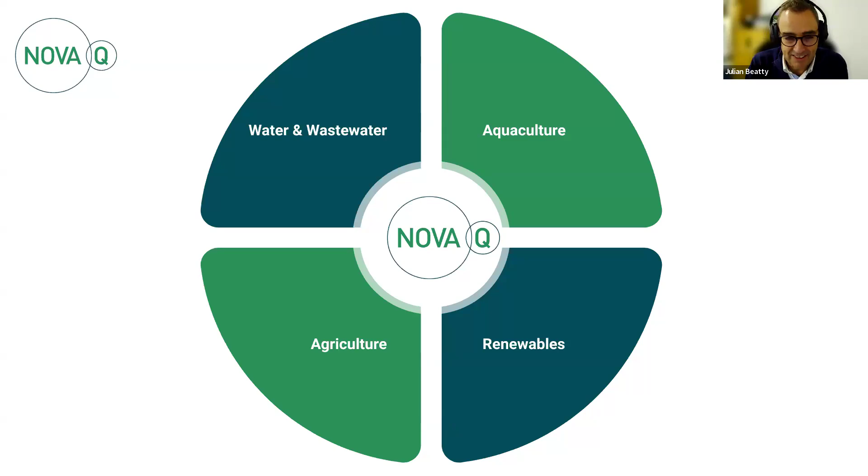For those that don't know us, NovaQ has been around now for 17 years, operating in Ireland and across Europe, in water, wastewater, aquaculture, and businesses in agriculture and renewables. Today, for the Water and Environmental Society of Engineers Ireland, we're going to focus on a couple of recent developments and innovations in terms of the wastewater side of things.

Some of it's innovation, some of it's addressing emerging challenges. I think the PFAS side of things is probably a scary area for a lot of people, and the fines filtration is very closely aligned—it works very well with the activated carbon part of the PFAS removal, so there's a logic to them all. The third area where we're very active is biological wastewater treatment, but that's for another day.

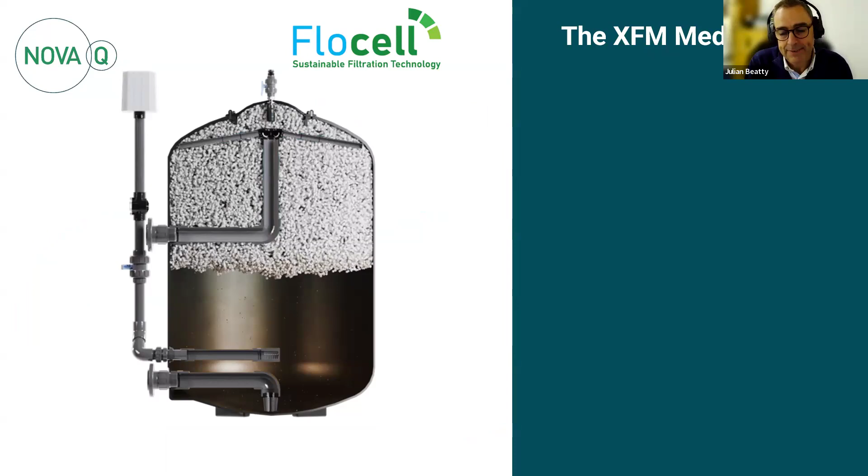So I'm going to start off on the Flocell XFM filters. Some of you may have seen these at the recent water and wastewater exhibition, or at various other water shows. They're a relatively new concept, and as opposed to, if you're looking in the space of fines filtration, you're comparing it to sand filters, cloth filters, all of that area. Key with these is that as a media filter and an upward flow filter, you're dealing with totally different pressures to those that you have in sand filters and cloth filters.

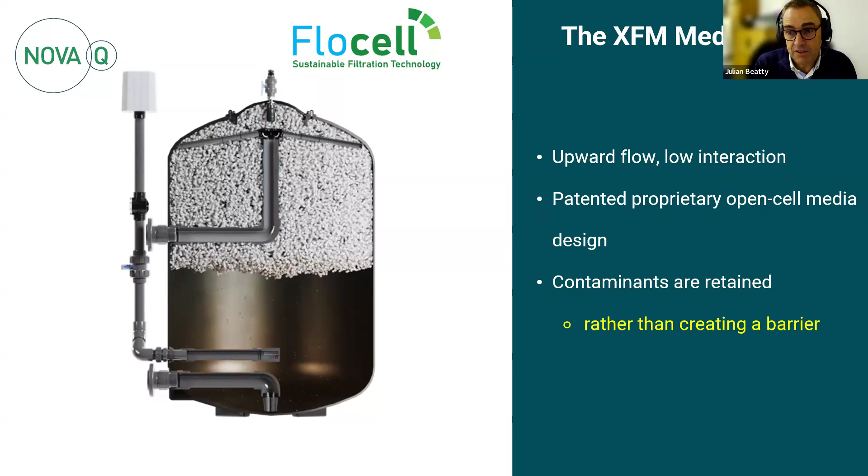So it's probably better to say that the contaminants are retained rather than the filter acting as a barrier, and that description is important. The relevance of it relates to the specific media they have—very, very small inside the filters. In each filter there's about 1,200 liters, and there's about a meter cubed of plastic media within that.

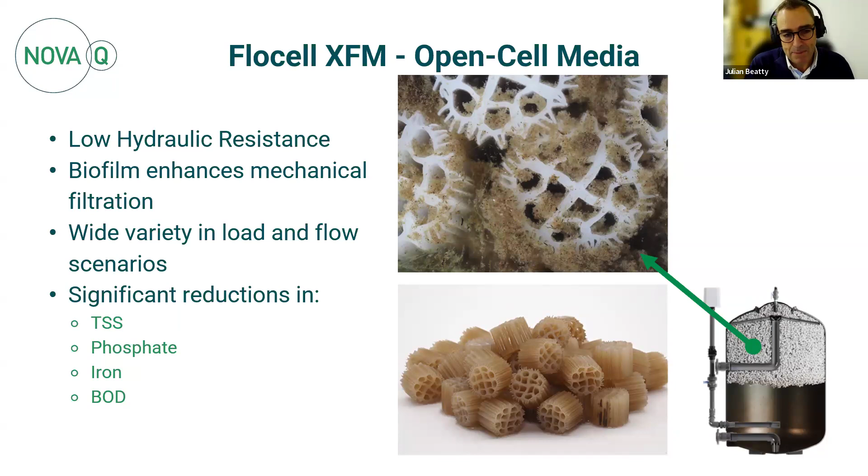The key feature, the key benefit is: sand filters and cloth filters very quickly have a hydraulic loss. With the open cell media, there's very, very little hydraulic resistance. Ironically, the dirtier the filter gets, the better it actually performs, because the biofilm that builds up on the media enhances the mechanical filtration properties. So we're targeting suspended solids, phosphorus, iron, BOD, COD reduction, and so on.

So I've got a couple of quick videos here now, which will illustrate how these filters work relative, in this case, to a sand filter. Importantly, these filters have got about 100 times more retention capacity than sand filters and cloth filters.

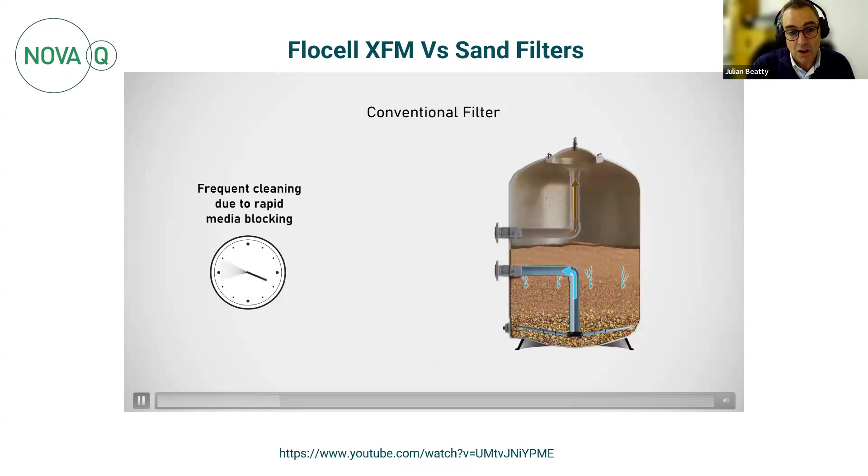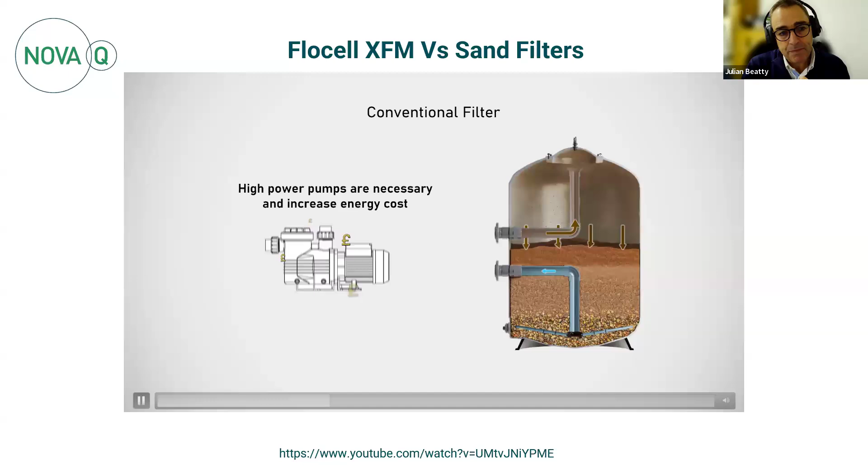Your conventional filter is top down—the water comes down through the sand, and the solids build up at the top of the sand. But as the solids build up, they cause a barrier within their own right, making the hydraulic properties much more difficult, meaning more energy needed. With the media filters, the water goes up through the filter, and the media itself is buoyant, so it's actually gravity that's retaining the solids within the media. This means it can last an awful lot longer without having to be cleaned or backwashed.

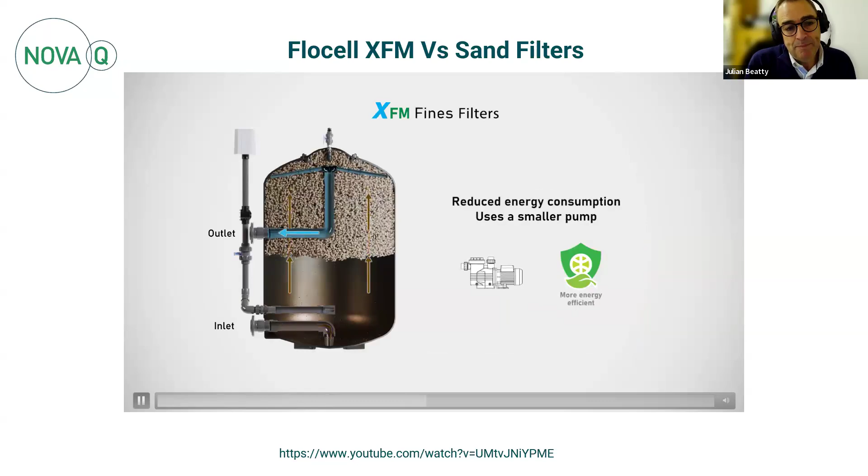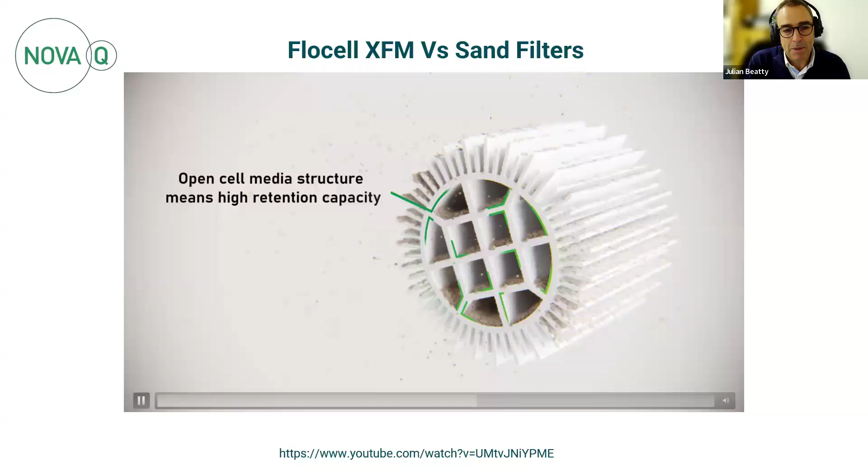The backwashing is very different, and I'll go into that in a second. Basically what you're looking at is the solids here. They're retained in the media by the resistance of the media, and part of that is a bit of a lamella effect within the media itself. This is all certified by Cranfield, and their paper is available.

For the backwashing of a sand filter, you reverse the flow, the water comes up from the bottom, it raises the sand and lifts the solids, but you use a lot of water in the process of backwashing.

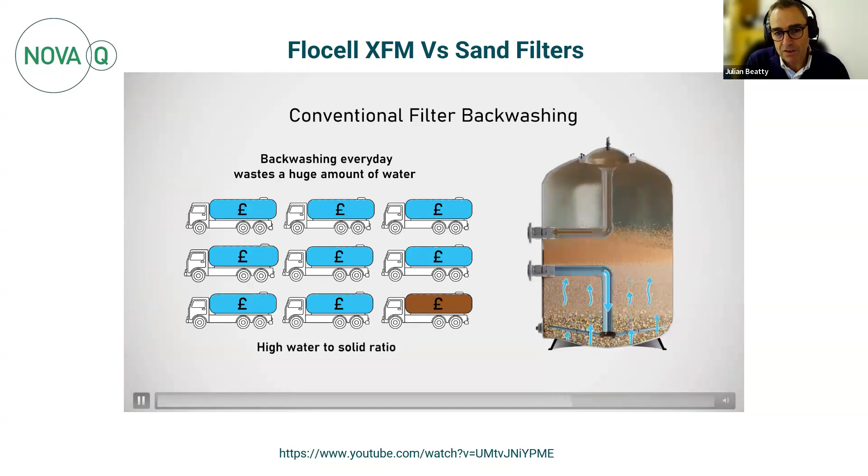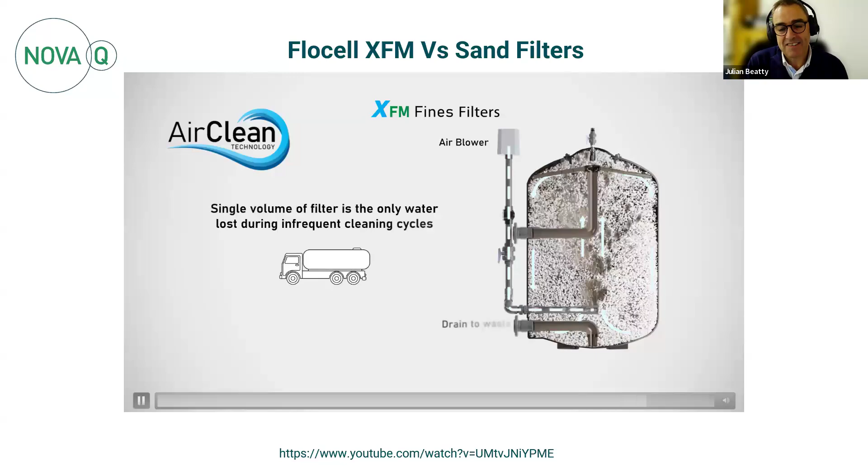With the XFM filters, we use a patented air process where we stop the flow, turn on the blower, and the blower moves all the media and dislodges all the solids off the media. We then just drain the tank. So your total amount of water lost in a backwash is one fill of water, about 1,000 liters per filter.

To see this visually, anyone who's been at the exhibitions will have actually seen this unit. It's our demo unit in play.

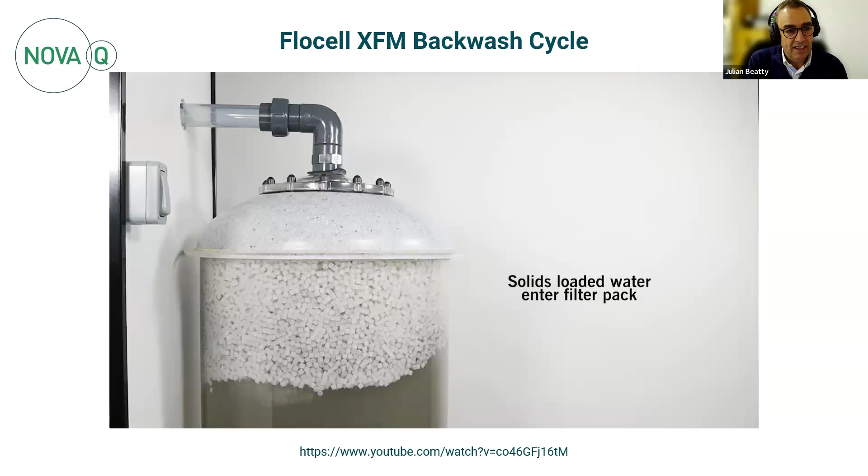You can see here as the water rises, the plastic media, being buoyant, stays up at the water level and comes up to the top of the filter. The dirty water there, you can see there's a whole lot of particulates in this case. It gets up to the top of the filter, and you'll see in a second the clean water coming out the top of the filter, while the solids are retained within the media.

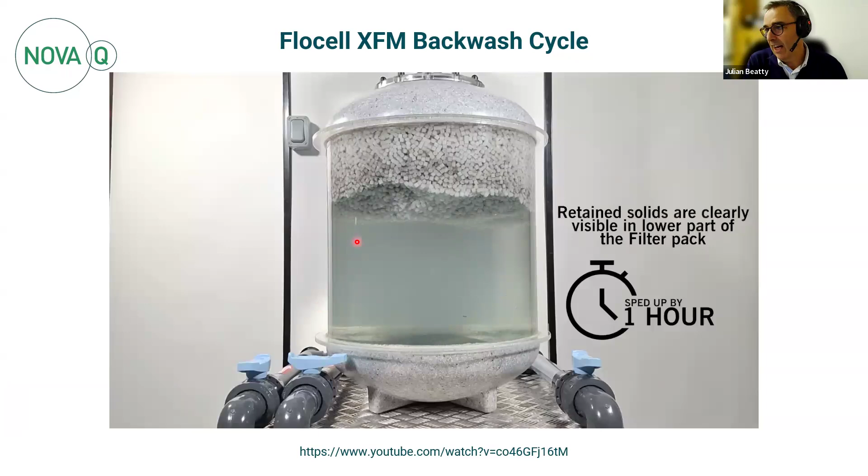Over time, what happens is the solids build up within the media, so it's just getting dirtier and dirtier within this media section.

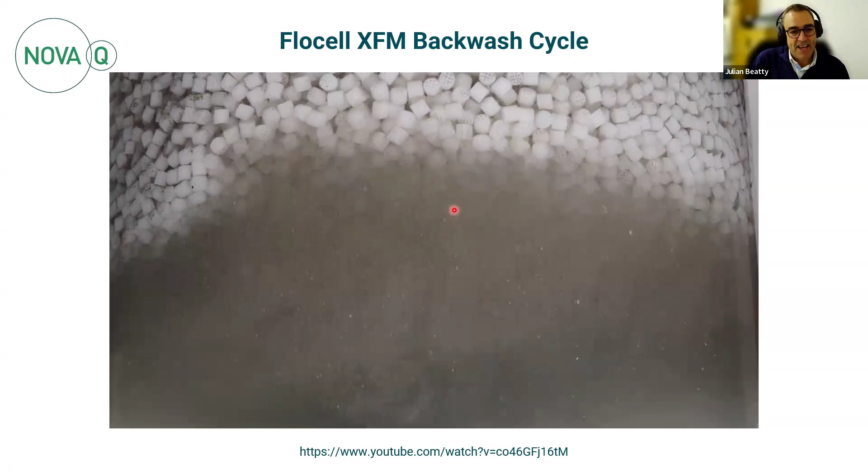When it's ready to do the backwash, you turn off the flow, turn on the air, and it literally turns into a washing machine. The air dislodges all of the dirt off the media, and you'll see the media getting really active.

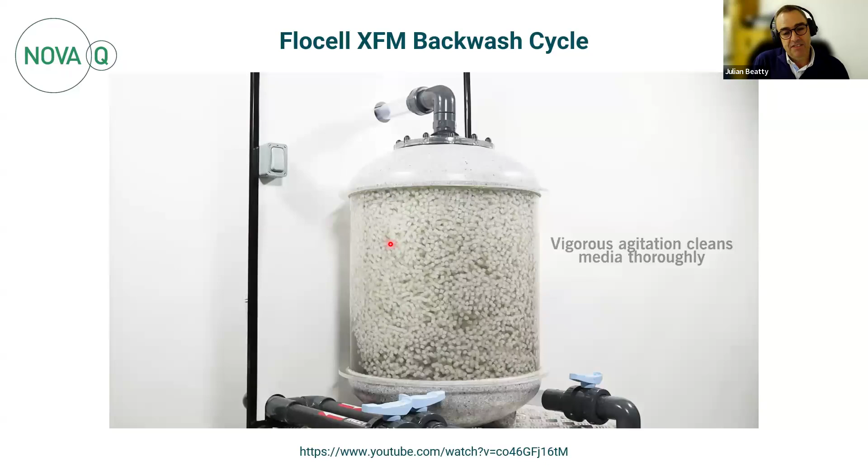What you have is dirty water, so the vigorous agitation cleans it. This only goes on for a couple of minutes. You then stop the agitation and drain the tank to the sludge outlet, and that dirty water is simply your discharge.

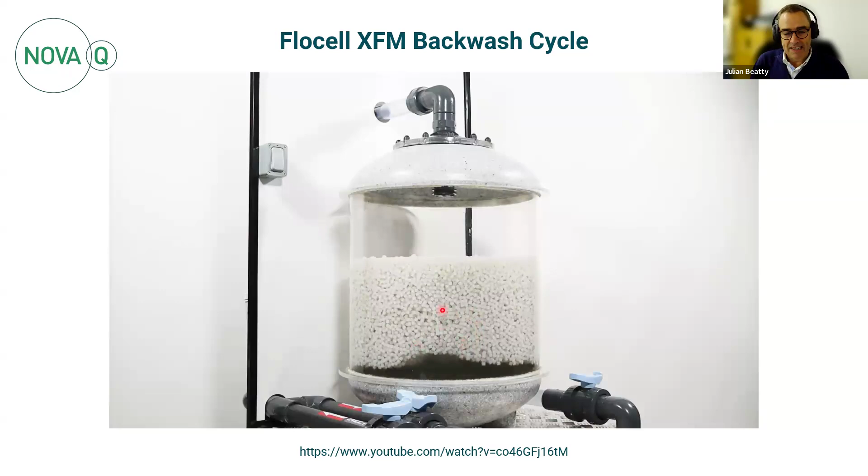We've had solid retention in that up to about 2.5% solids, so you are genuinely getting a really good sludge within that. It's a far higher capacity than you'd have with a sand filter and so forth.

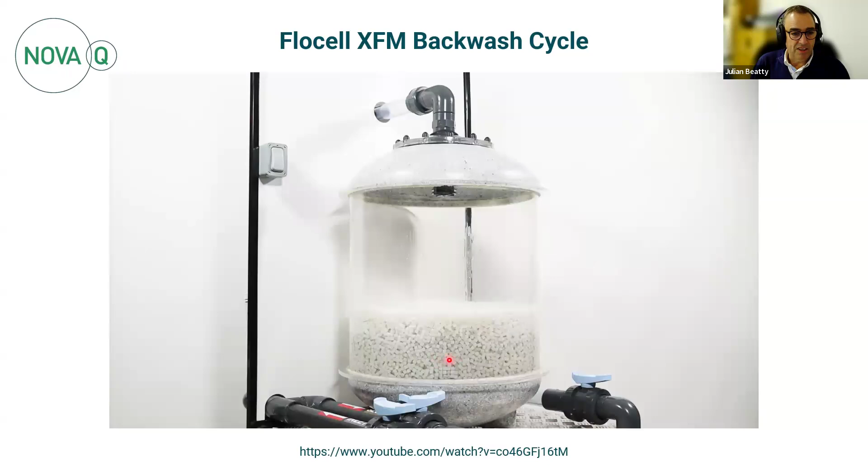When the filter's empty, you just close your sludge line and turn it back into flow mode, and you see here the water starting to build up again. When the water gets up, it just lifts the media, and the whole process starts all over again.

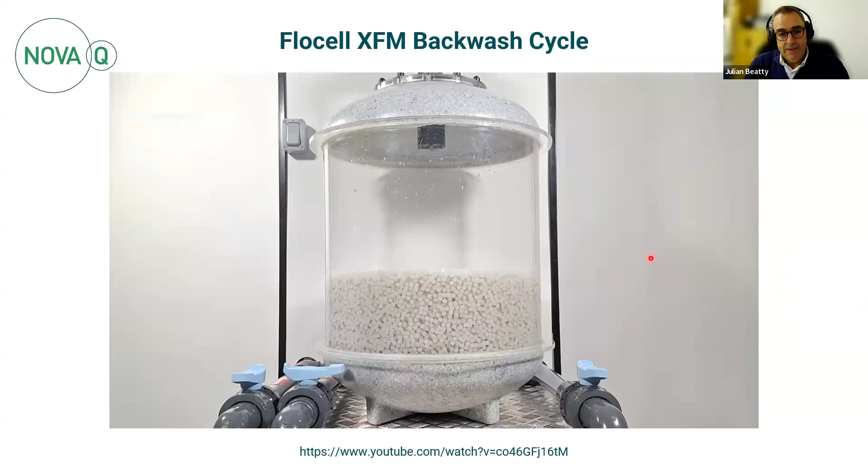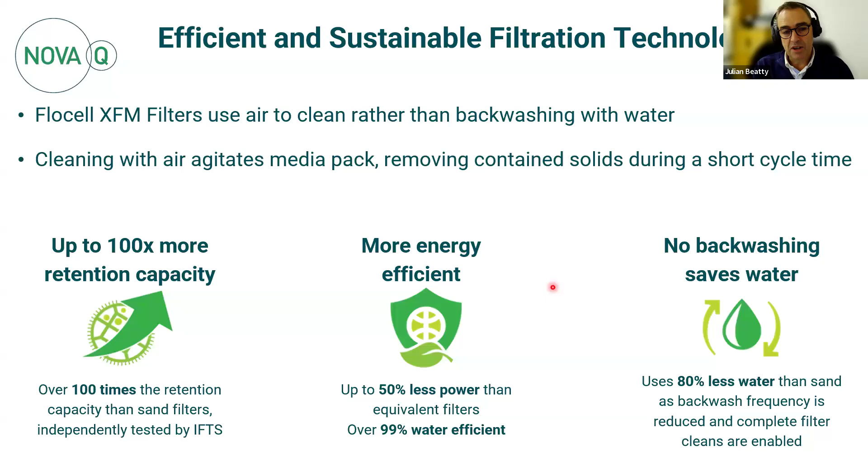So it's a very efficient system using very little backwash water and very little human intervention. We've got a system here that has replaced two sand filters. The sand filters were being backwashed on a daily basis. The XFM filter is now being backwashed about every 3 weeks, just once every 3 weeks, so it really is very, very efficient in that regard.

So the units themselves now come in containerized options. Each containerized option goes 5, 10, 20, and 40 liters per second flow capacity.

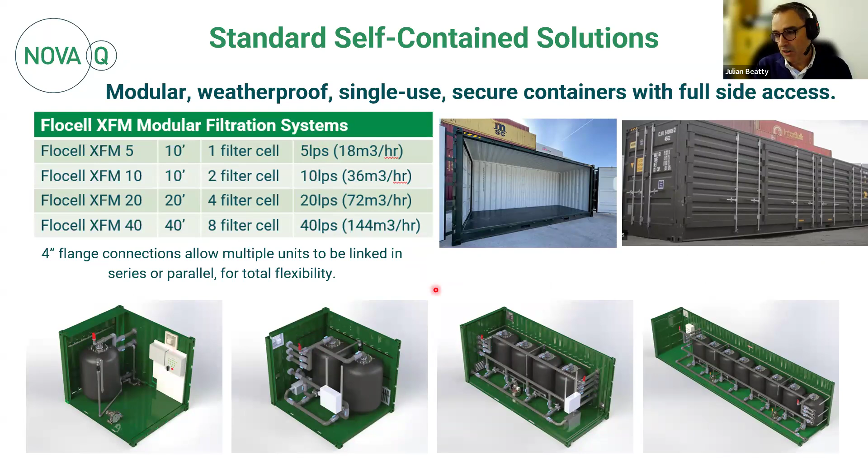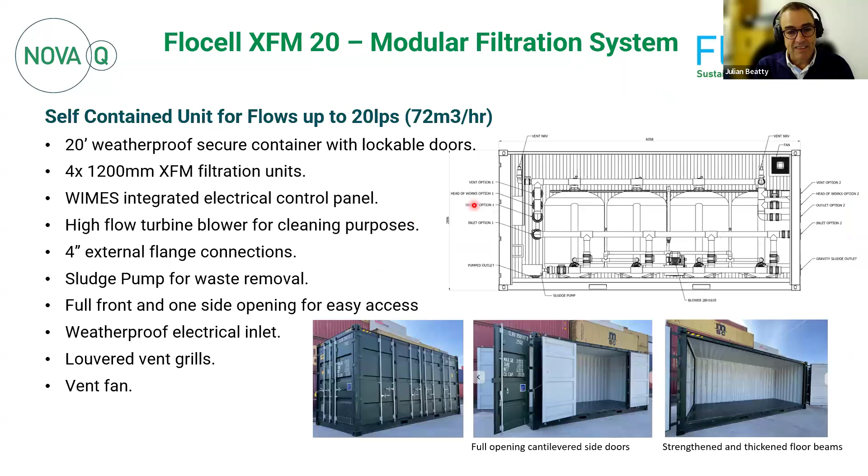Simple containerized units. I've quite a lot of information on these slides, which I'm not going to go through, it's really for people coming back afterwards to be able to see it. So the XFM5, the XFM10, XFM20, and the XFM40. You get 144 cubic meters an hour of flow through one of these units, and they literally arrive plug and play, ready to be used.

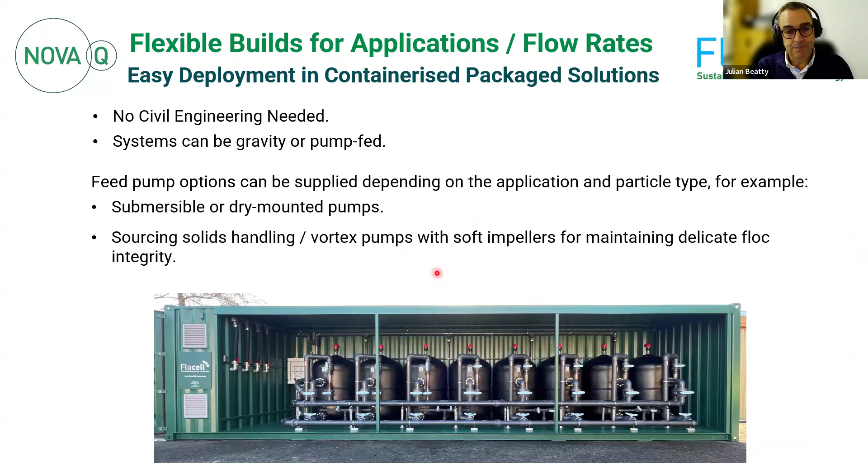And they have done reference case studies that have been published on their sites and on LinkedIn and so on.

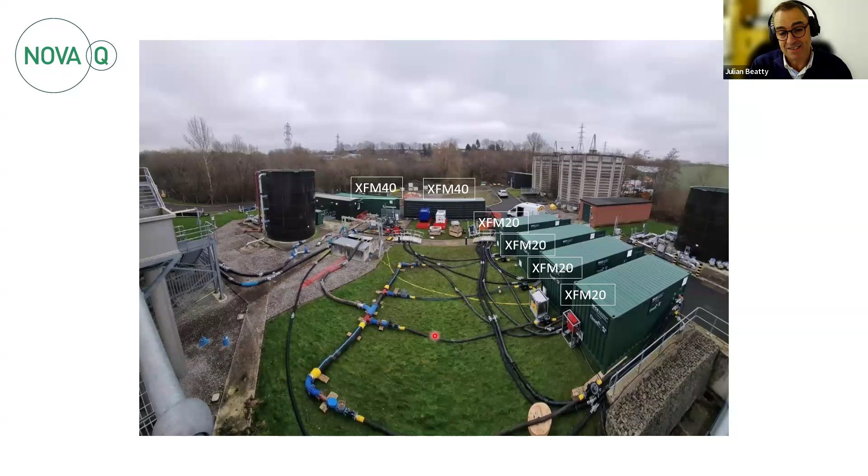So it's quite a big, comprehensive installation. They're not exactly sure yet how they're going to set it out as a final installation. What's likely to happen is that these XFM20s will be replaced by one or two more XFM40s, just to make the whole thing a tidier installation. But this has all been done because the system has worked so well, taking a site that had been failing on a whole load of levels and improving it significantly.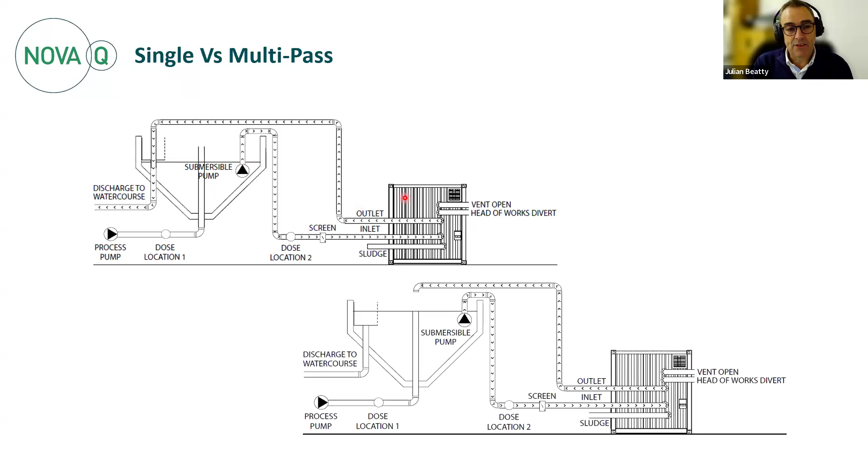Applications tend to be either direct single pass, where you might be taking water out of a clarifier or a rainwater harvesting tank, or whatever the source might be, single pass through the filter into the outlet, or it might be multi-pass. So just a few more case study highlights on this.

One of the big things these filters are used for is phosphorus removal, some with or without chemical addition. That factor really depends on what form of phosphorus is in the system. If you're dealing with orthophosphate, then almost certainly there's still going to be some ferric addition needed in a pre-mixing tank to add a bit of extra flocculation. If the phosphorus is just tied up in solids, as opposed to being orthophosphate, then it should be fine for it to come out in the filter itself.

Another site here, they were tankering water off site. Literally all the water coming off site had to be tankered because they couldn't meet any of the limits they had. You can see the inlet side, there's quite a lot of particulate in it. From the day the XFM was installed, they never had to do any more tankering off site, and you can see there's a fairly nice sludge buildup on that. So that particular site saved a lot of money on tankering.

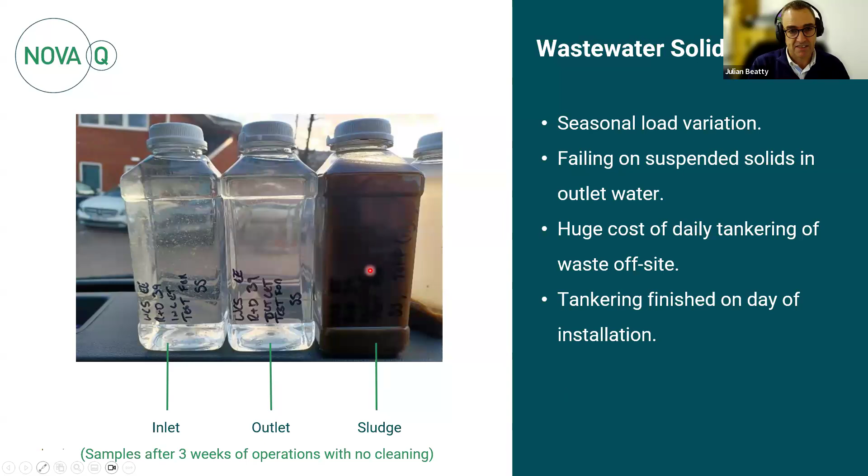A refinery site where you can see the inlet is absolutely hideous coming off, with a lot of hydrocarbons and everything in that. The outlet water is really clear. Again, in this case, the sludge was so heavy that they had to do two backwash passes, which doesn't take an awful lot of water or time, but you can see the sludge retention is really good.

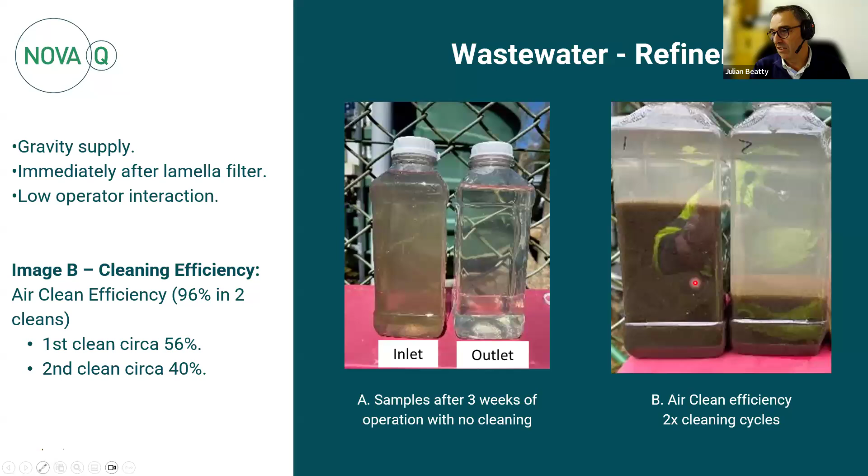The technology itself originated in the swimming pool area, and you can see here's a case pre-installation, post-installation, and then with ongoing use it goes to gin-clear water.

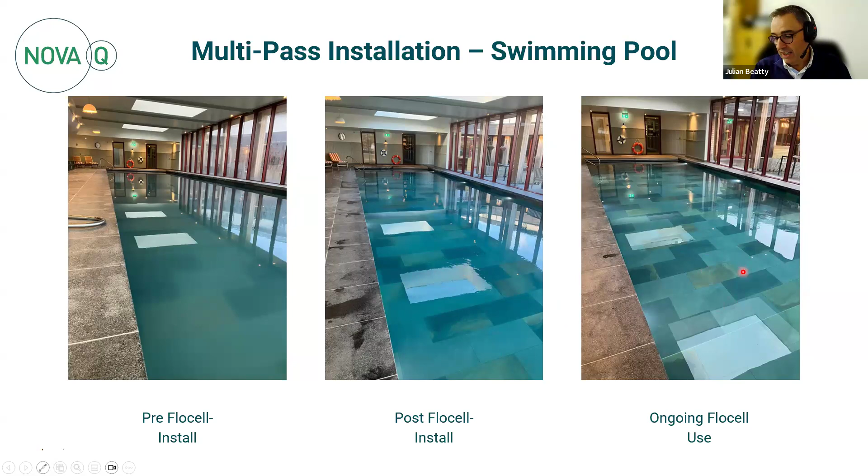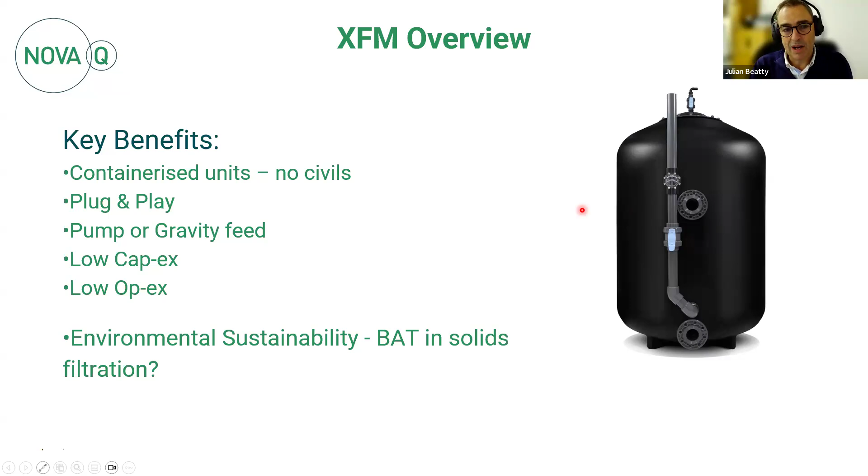You're looking at a very simple system, containerized units and so on. It's plug and play, pump or gravity feed, very low capex, low opex. I think the two key things, if I was asked the biggest benefit of the XFM filters, I would say it's the lack of human intervention required in operation, and the other aspect is the lack of hydraulic loss during operation, which makes it a very attractive product.

So there's loads of ESG benefits, as you can imagine, with chemical reduction, energy efficiency, and so on, which is good. Depending on what you're actually filtering, that sludge, certainly in our cases, can often go back up to the head of works.

Not in Leash Sawmills, where it goes off site as concentrated hazardous waste, but we do have other installations on water treatment plants where the sludge goes back to the head of works, so they have no sludge going off site.

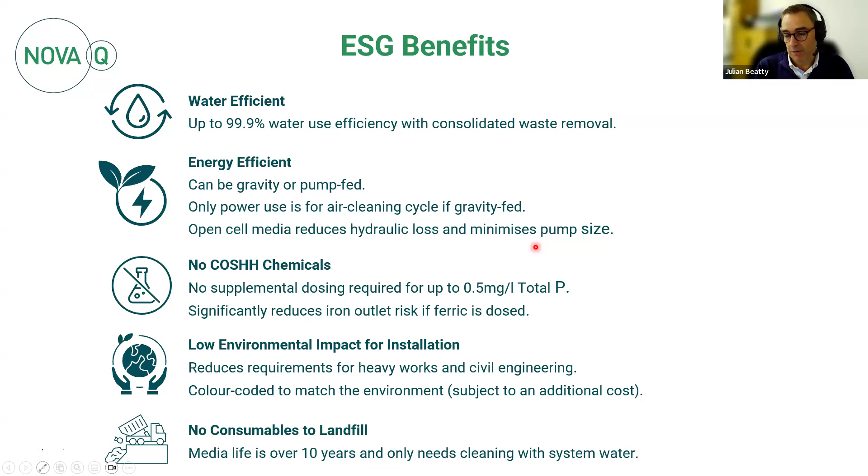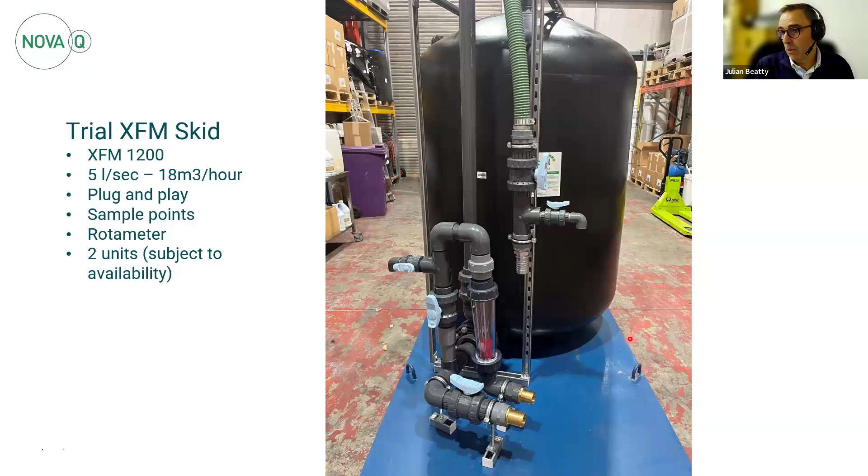So that's the filtration side of things, and we have that filtration to make our carbon filters work better, because we don't like to clog up our carbon filters with colloidal matter. I could talk about activated carbon for a day, because there's so many different extensive parts of it, but for this we really want to focus on these persistent organic pollutants and PFAS in particular.

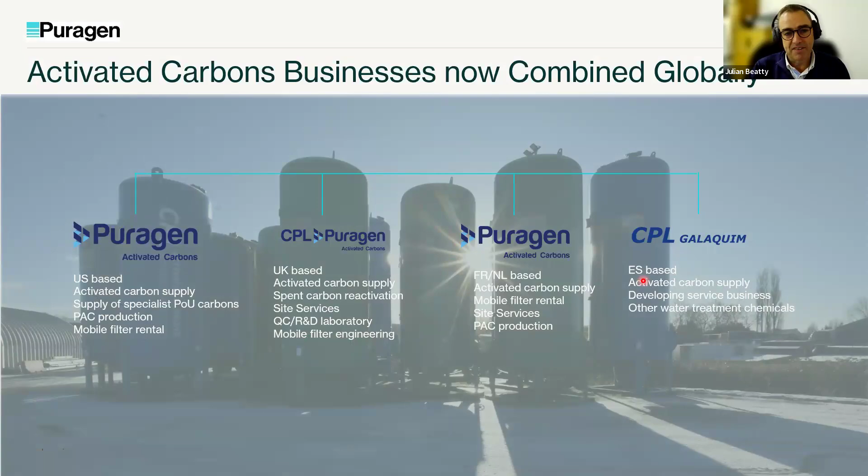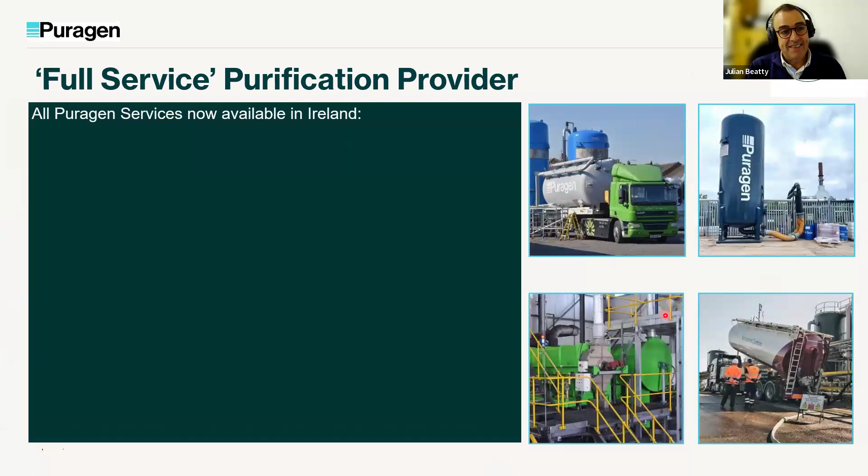So just for starters, Puragen - most people are not familiar with the name Puragen because they're probably more used to the names CPL activated carbons, and so on. But since last year, or since late 2024, CPL has been rebranded as Puragen, and since the middle of last year, NovaQ, who've been working with CPL activated carbons for the last 13, 14 years, we just signed a new distribution agreement with them, which now means we're working with them across all areas of activated carbon, mobile filtration, and so on. We've extensive stocks in Dublin on the back of it. So Puragen is a full service provider, which is really important.

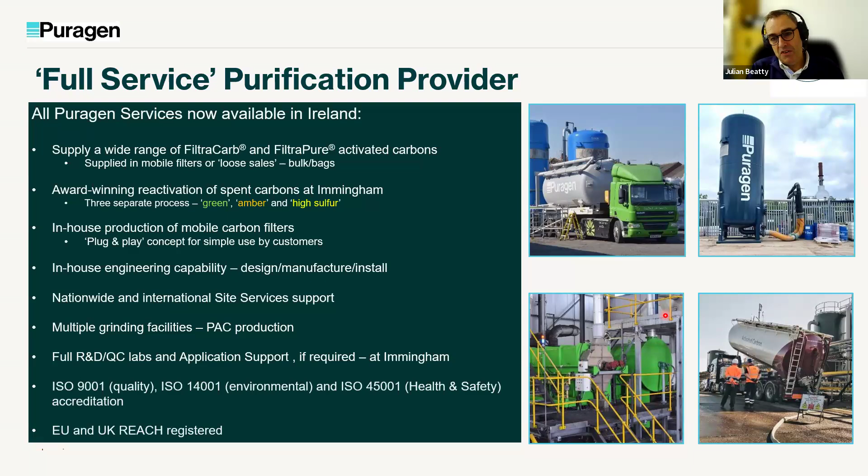So it's not just about supplying activated carbon. This is genuinely cradle to grave on activated carbon. So from the activated carbon supply, it's across water, wastewater, vapor phase, and so on. And it's taking that carbon back - well, it's putting that carbon into filters as required, but then also taking that carbon back into a reactivation process. And the reactivation is incredibly important when it comes to PFAS, because it's part of the destruction process in PFAS.

So, what can activated carbon remove? We look at it in two sides. On the organic side, you've got gas phase and liquid phase, and on the inorganic side, where we're generally looking at the need for additional catalysts or impregnants to be added to the carbon. Biggest area for us in that would be for H2S and ammonia removal, but there's a lot more there in terms of solvents and everything as well, for volatile organic compounds, and in liquid phase.

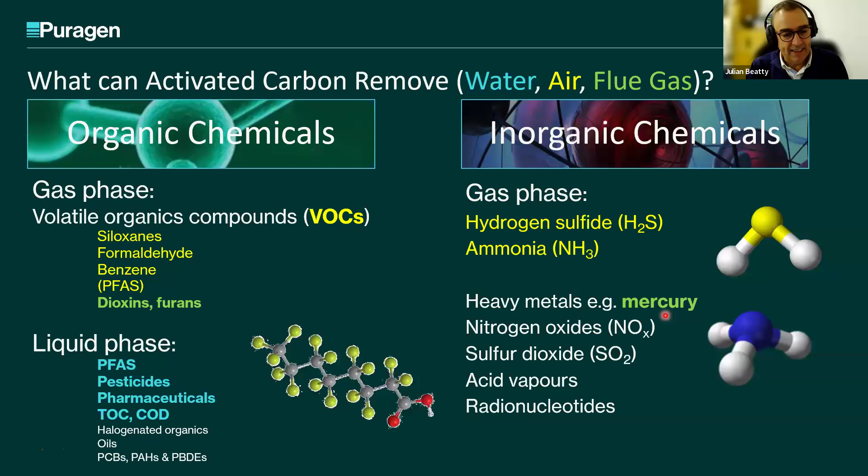Really, as I said, the key thing for today is just to talk about this PFAS removal. So what is PFAS? The PFAS chemicals are very much in the headlines now, because the regulations are quickly coming down the track in terms of not so much the removal of them, but certainly more and more sites are being asked to identify whether or not they have PFAS and persistent organic pollutants within their waste streams.

And what we're discovering is that even if we don't have PFAS in processes, that doesn't mean that we don't have PFAS within the waste streams coming out of all kinds, whether it be municipal sites or industrial sites or what have you. There are per and polyfluoroalkyl substances - there's over 10,000 compounds that are out there. There's widespread industrial use. What we'd be most familiar with is if you see them in non-stick environments, the chances are you're dealing with some form of PFAS. There's fabric coatings, Gore-Tex and so on.

We see them in PTFE for non-stick food surfaces. There's been widespread applications since the 1950s when they were first introduced, and in firefighting foams as well, which means that in places like airports and so on, they're particularly sensitive areas where these might have been used. They're incredibly stable and don't break down readily in the environment. But where they do, even their byproducts are also problematic. And so there is this unhelpful term, forever chemicals.

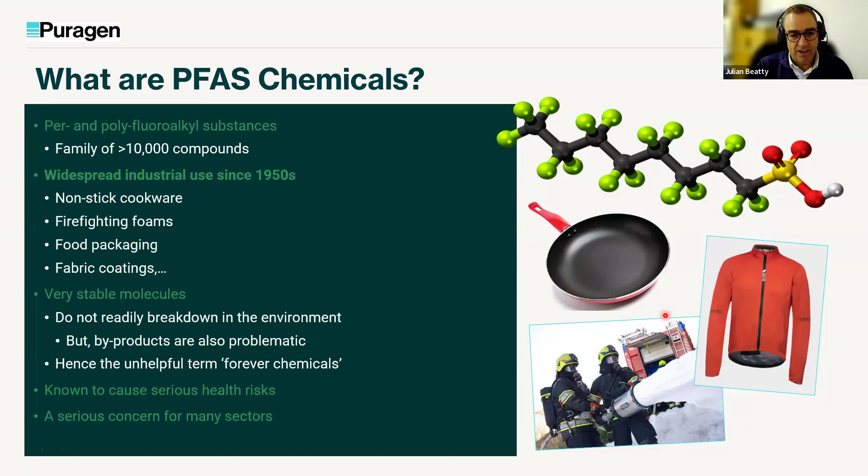So the solution, with Puragen, we use the phrase search, capture, and destroy. What does that mean? In terms of search, when we went back to look at this originally, talking to the technical guys in Puragen, they thought they'd just go out to the lab and get things tested to see how much PFAS, or what PFAS, was out there. It was actually very difficult to find the lab capacity to do the measurements of what was there. So Puragen built up their own laboratory techniques to support external laboratory techniques for identifying the PFAS compounds.

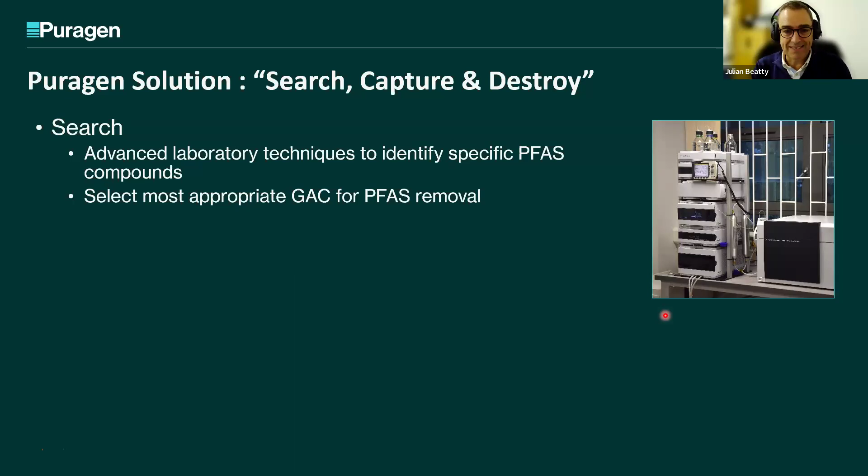Interestingly, because of the reactivation facilities they have now, the carbon going back for reactivation is being tested for PFAS before it goes into reactivation. What we're discovering is that PFAS is there in many, many cases. In terms of customer waste, we are able to take it, identify the PFAS present, and select the most appropriate carbon for that PFAS removal. So that's new, and that's exciting.

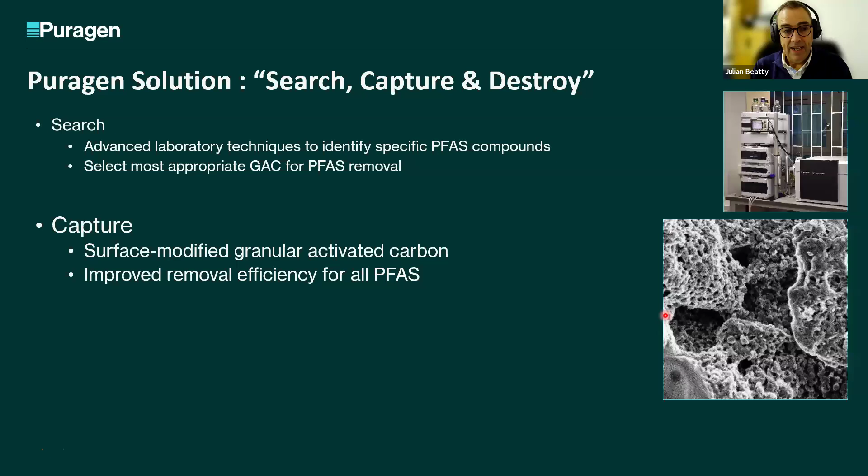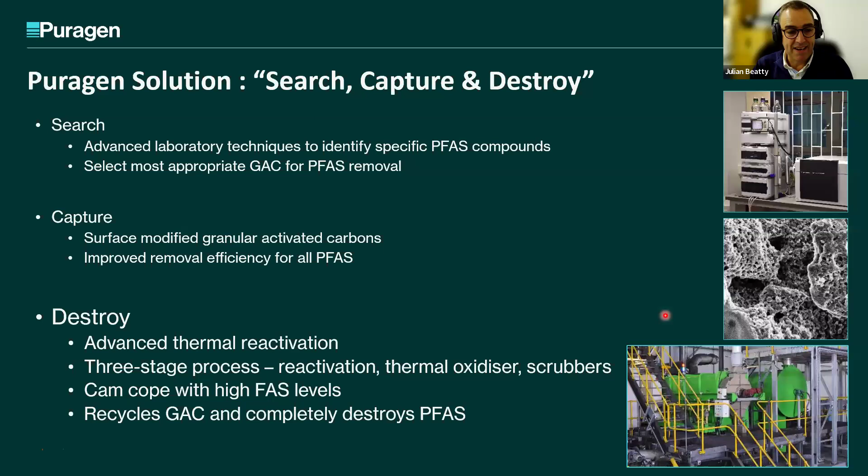So when it comes to the capture, we've developed several surface modified activated carbons, one or two of which are now commercial, which have improved removal efficiency for all PFAS. At the end of the process, that carbon can be sent back to the reactivation facilities in Immingham, where they go through a 3-stage process of reactivation, then thermal oxidizer and scrubbers, to make sure that even post-reactivation, anything that comes off in that process doesn't get out into the atmosphere. We can cope with very high PFAS levels, and recycling completely destroys the PFAS.

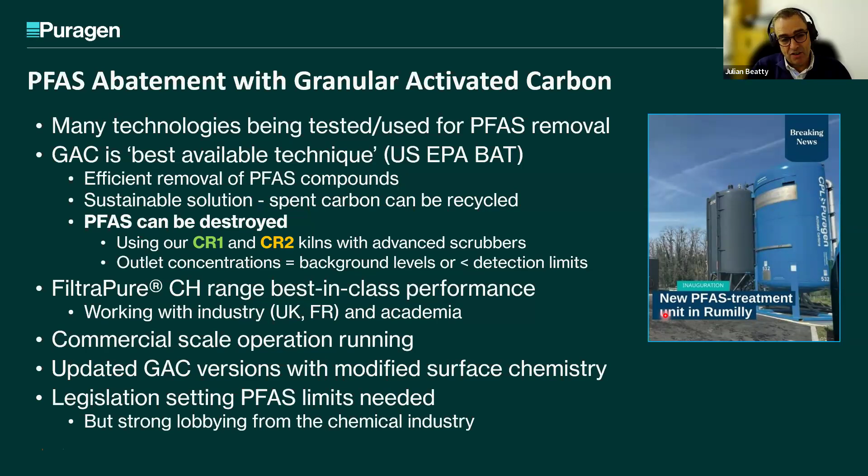The FiltraPure CH range, this modified carbon, is best in class, and it's now at commercial scale and running. There are new carbon versions coming all the time, but legislation is only coming to the fore now in terms of setting the limits needed. There is strong lobbying from the chemical industry at the moment trying to cut back in this whole area, but there's equally strong lobbying from the environmental side about where these limits need to be set. So it'll be very interesting going forward to see what happens in this space.

With the surface modified activated carbons, this is kind of the first range of these. Up to now, it's generally been standard carbon for this application, and we've done a lot of work comparing these surface modified products to the standard carbon methods. What it does is the surface modifications expose the carbon chain within the PFAS molecules, and it improves the adsorption capacity.

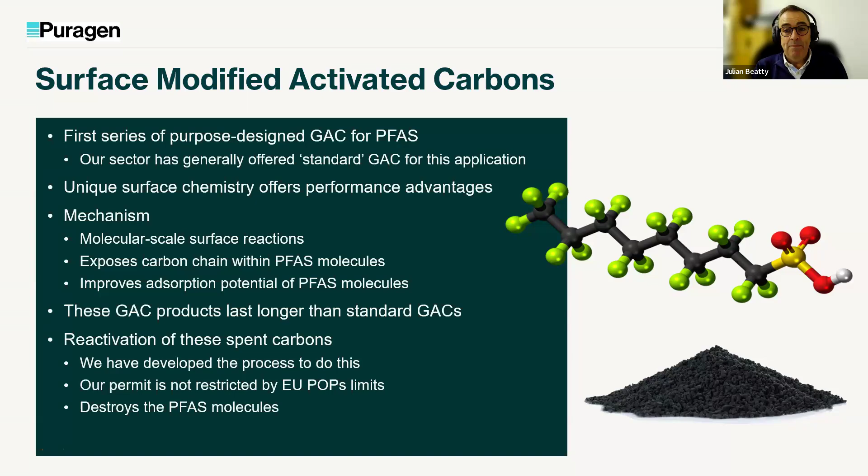We've got case studies confirming this. If you look at the blue, you can see where standard reagglomerated carbon performs reasonably well on some of the longer chain PFAS, but on some of the shorter chain ones, it struggles. With the modified carbon, you're getting excellent removal on the long chain PFAS, and even on the shorter chain where standard carbon struggles, you're getting about 3 times more removal with the surface modified carbon. For water applications, you can improve this further by having multiple passes on the activated carbon.

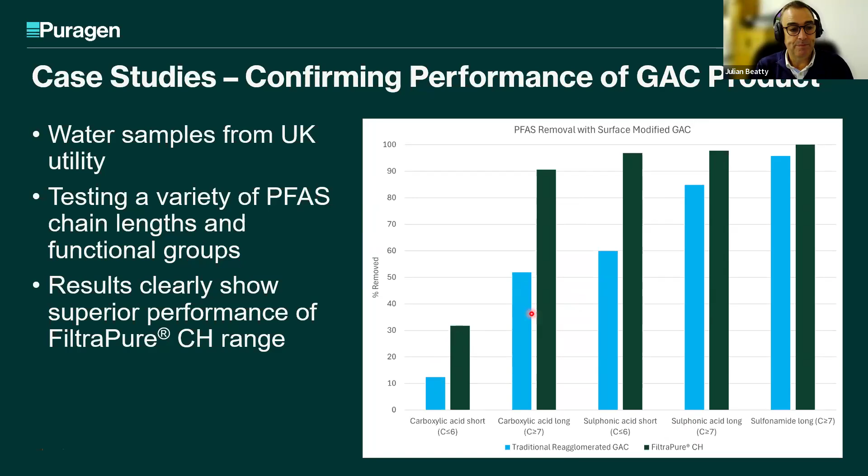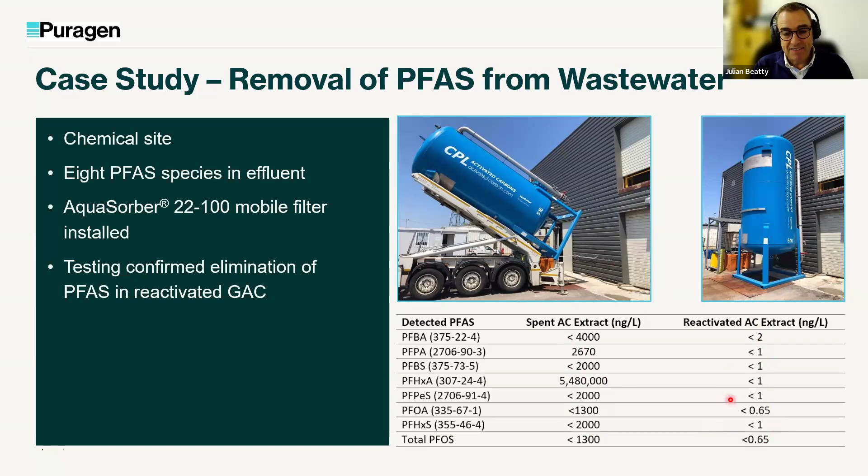You then take the concentrated spent carbon. You can see the levels of PFAS that we have on the spent carbon are really, really high. And on the reactivated carbon, they're eliminated. So we know the reactivation process does eliminate PFAS, but then everyone asks, where does that go? Surely that's just going out with the rest of it.

But we've got independent testing to show that the gas phase emissions from the plant are incredibly low, and the liquid phase is 0. The stack levels, interestingly, you're looking at 22 nanograms on the stack, which does say, well, 22 nanograms is not great, but when they did a test blank away from the stack, it's still 19 nanograms with a level of uncertainty of 27%. So this is considered to be a very good result, and it's continually being monitored going forward.

So this is where we're able to use the phrase search, capture, and destroy, because we're capturing the PFAS and we are destroying it in the reactivation process.

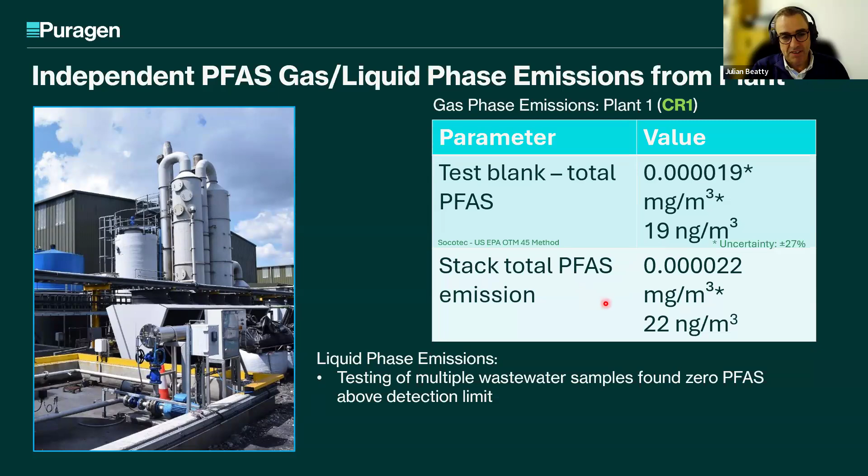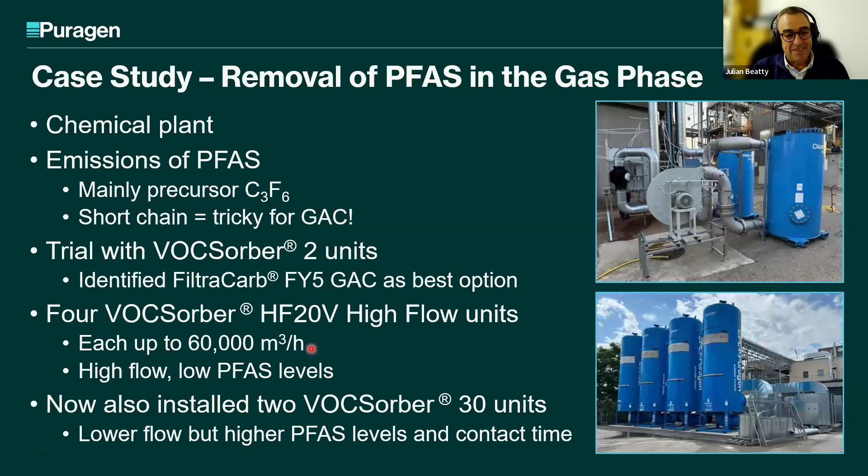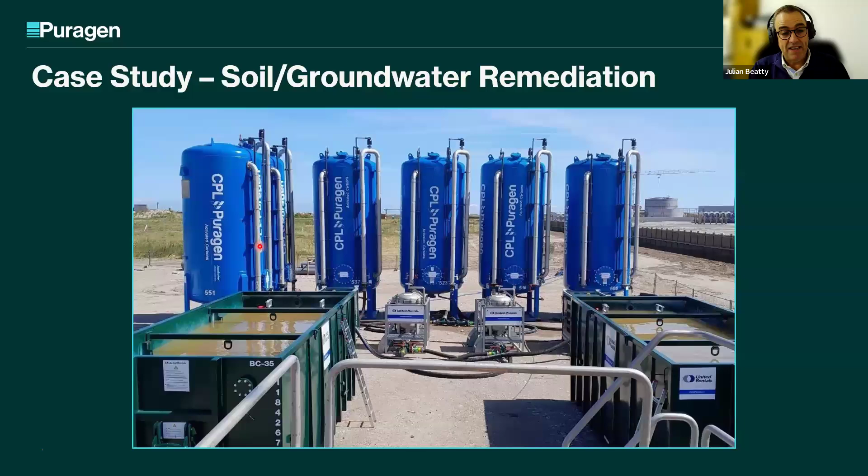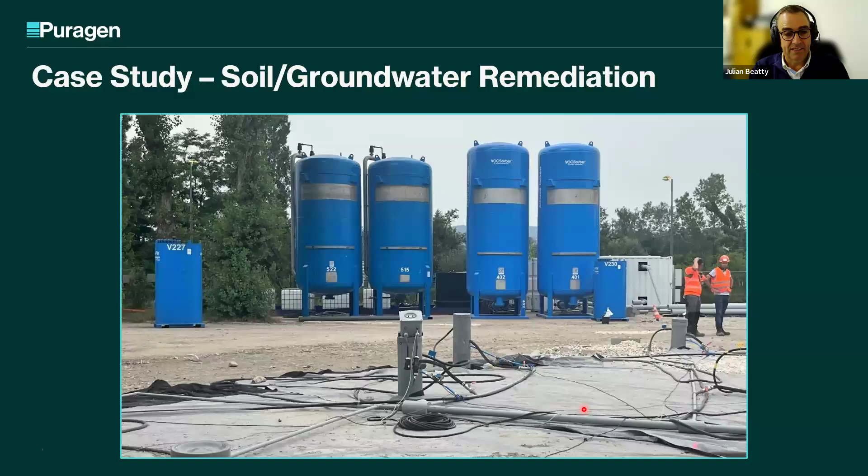These are all award-winning innovations now, which is really exciting, and we've got the backup of an R&D team and lab facilities within Immingham. Andy Leet, who's the technical director, he really is now becoming quite an expert in this area, and it's great to have his support available to us over here.

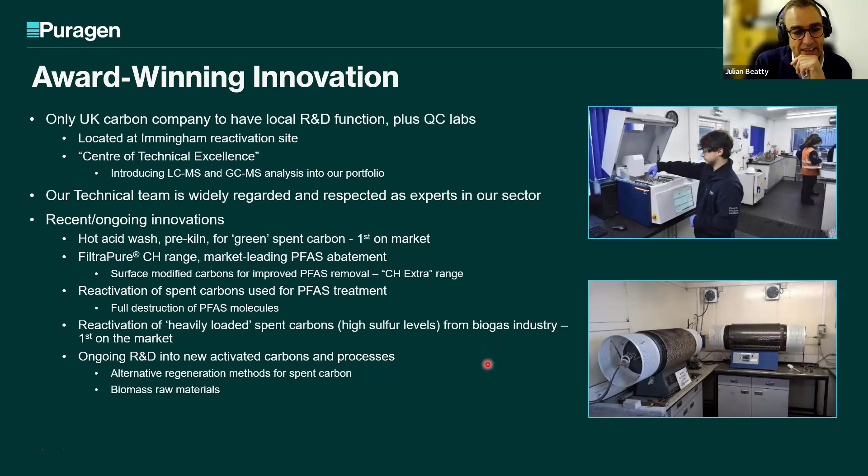We're about to start doing some work with one of the universities here on just having a little bit more in-depth analysis on what's happening from an Irish perspective. And there's always ongoing research and development on new surface modifications on the carbons to see, particularly if we can improve the performance at some of those lower chain, lower chain problem areas.

So just to finish off on this, I've mentioned that reactivation is relevant. From an Irish perspective, reactivation hasn't been that relevant up to now because it's actually been very difficult to remove spent activated carbon from Ireland, because you've got to go through all kinds of TFS approvals - we didn't have TFS in Ireland, but that's now changed.

And reactivation is really important because from an ESG perspective, most people don't realize that activated carbon has got quite a heavy carbon footprint. So for every ton of virgin activated carbon, coal-based activated carbon, that's 6.7 tons of CO2 equivalent. Coconut carbon is still 5.4 tons, and wood is 3.5 tons. But reactivated carbon is only 0.46 tons of CO2 equivalent. So from an ESG perspective, if you can use reactivated carbon, not only is it a much cheaper carbon to use, it's got a much, much lower carbon footprint.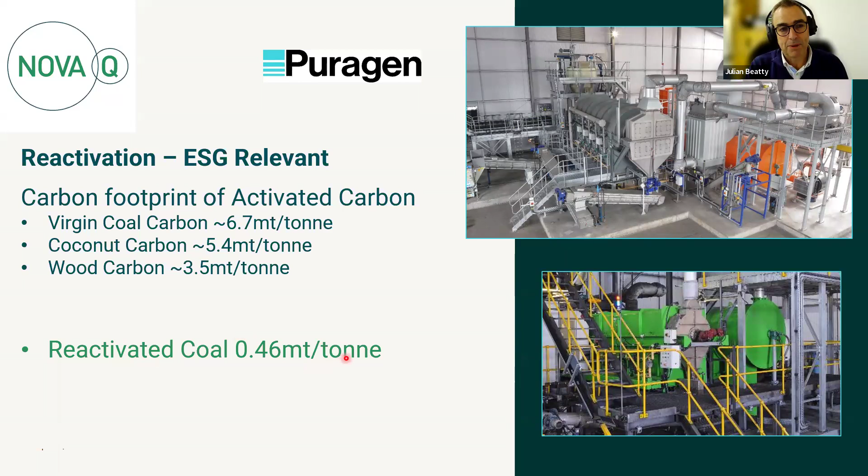And from an Irish perspective now, we've bought into this, what they call the REACT-Sys, the cradle to grave, where we've got TFS approval to return spent carbon from Ireland to the Immingham facilities in the UK. We're now doing this - I think this month we'll probably have two container loads of spent activated carbon going back for reactivation in Immingham, which is really exciting, because that's carbon that would before now have either gone to incineration or gone to composting and then ultimately landfill.

And bear in mind the activated carbon that's gone to landfill is contributing to PFAS in the landfill, which is coming out in the waste leachate and the gases coming off the landfill. And we see that because we're seeing the elevated levels of PFAS coming off the activated carbon that we're using on the landfill gases.

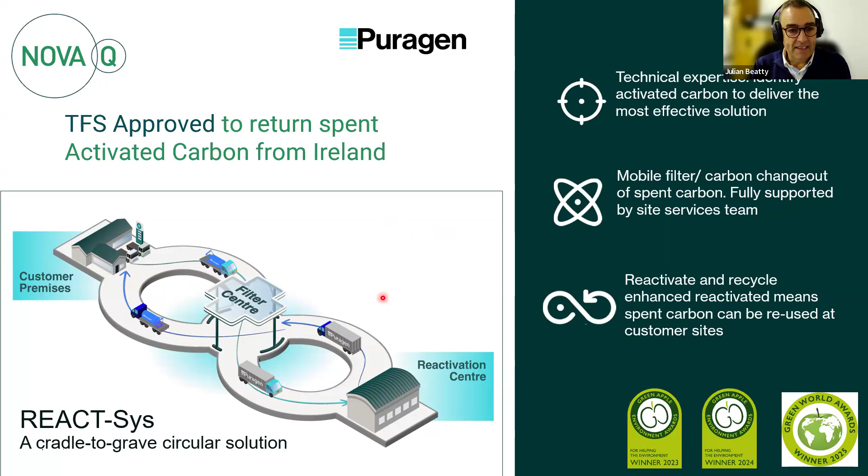That's the end of my talk, and I'm now going to stop sharing again, see how this goes.